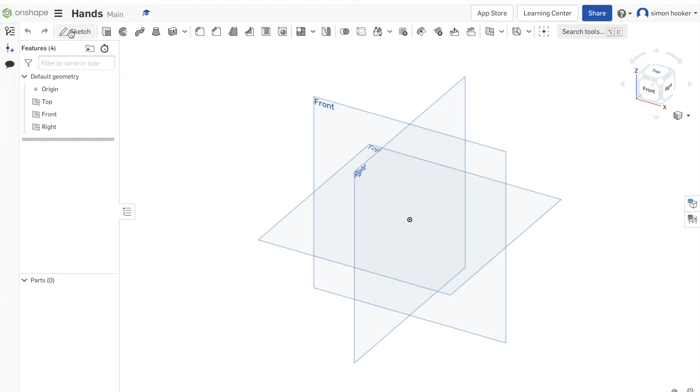I've just created a new document on Onshape and called it hands, because we're going to make the arms and hands for the robot. I'm going to click on sketch, and for the name I'm going to call this palm. I'll click on the pencil mark, type in palm, and for the sketch plane I'm going to select the front.

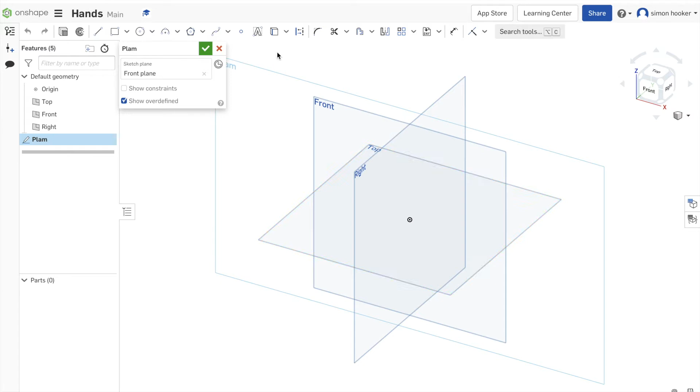Don't press the tick like I just did. If you do, just right click and go to edit and it will come back to you. Now I'll click on the front so it spins the object around in front of me. Click on the circle, click once to start drawing, click again to finish. We'll dimension this to 6mm and press enter. If I'm happy with that, I press the tick.

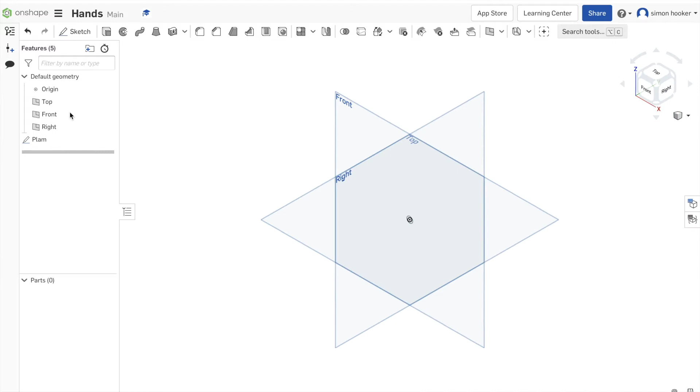I'm going to view it in isometric and click extrude. I'll select palm so it knows where it's going, choose symmetric, and change the setting to 3mm, the same as the holes we made in the body.

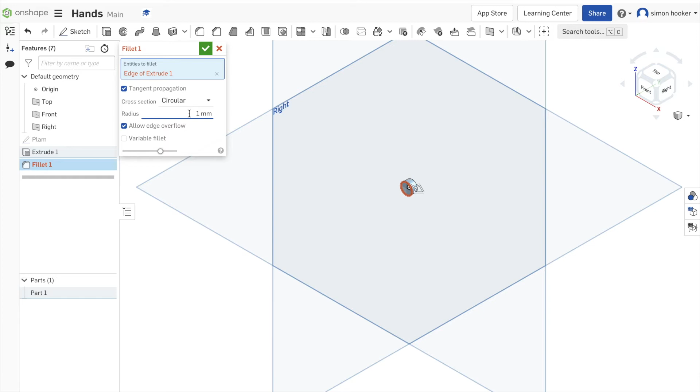Using the scroll wheel to zoom in, I'm now going to apply a fillet, 1mm to each side. So we've done one side, scroll in again, click on the other side, and we'll have a rounded edge on both sides.

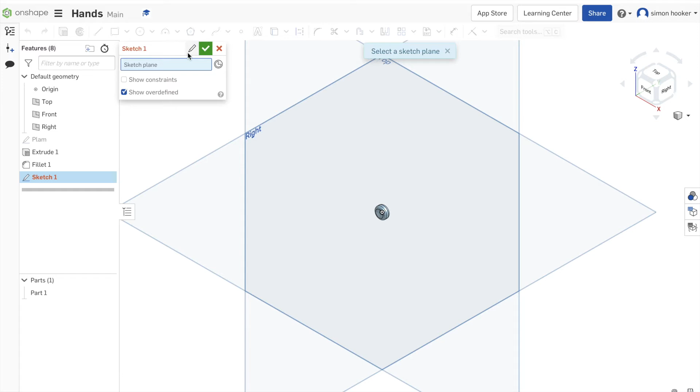The next part we're going to do is the arm. I'll press sketch, click on the right plane, and rename it to arm so we know what this is if we need to come back to it. Once I've clicked that right plane, I'll press the right face so I'm viewing it nicely.

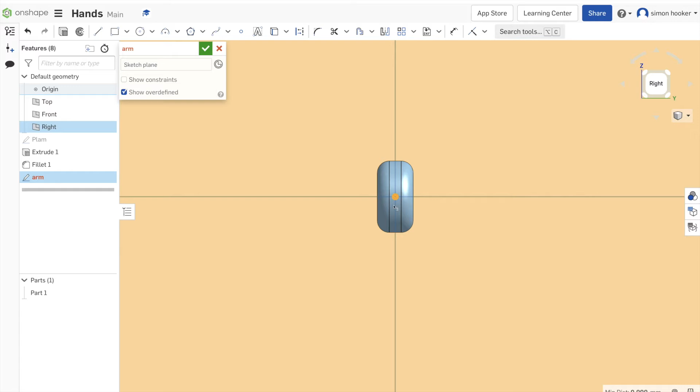We're going to draw a circle which will need to be resized to 3mm. Click once to start drawing - I just noticed I hadn't selected the sketch plane, that's why nothing was coming up. So if we click out, zoom out with the scroll wheel and re-click, the right plane now appears and we're good to draw this time. Apologies, still getting a bit used to this.

We click on that circle, click once to start drawing, and drag it out slightly bigger than the thing I'm trying to draw, then resize it down to 3. Double click to change the number, type in 3, and I'm happy with 3.

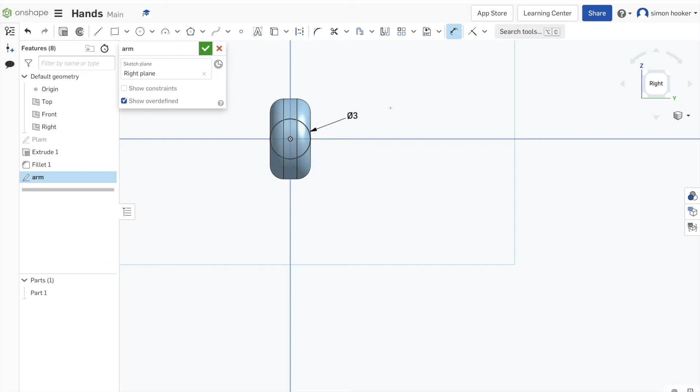We view it back in isometric by clicking that little button just below the square. Hopefully you're picking up these tips as you go on and getting a bit more used to using the software, with this being our third tutorial.

Extrude - I want to click on arm. It comes shooting forwards, so I'll flip it in the other direction and reduce the length down to 20mm, then press the tick.

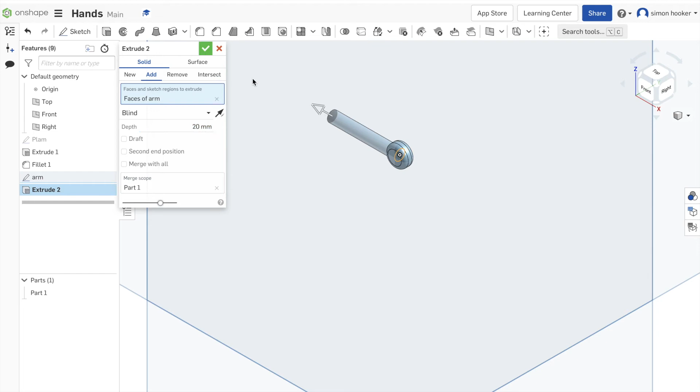So that's the arm, that's the palm made. Now we need to think about the fingers. Sketch again, we'll call it fingers, and the sketch plane is going to be top.

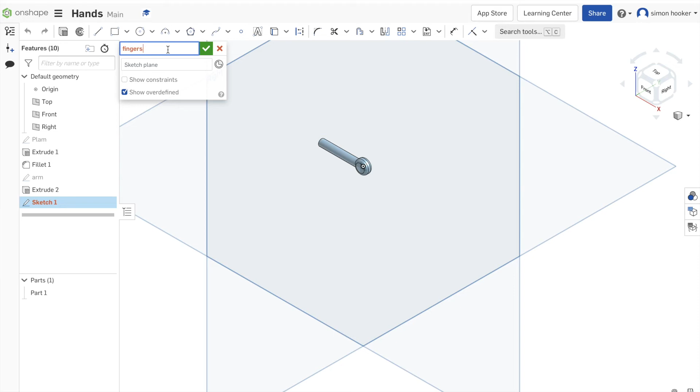This time, rather than doing a circle, I'm going to do an ellipse or oval shape, just to make it a bit more interesting and part of the design. So the sketch plane needs to be top, as we've just said. We'll click on the top plane first so it spins round, and use the scroll wheel to zoom in, making that area bigger.

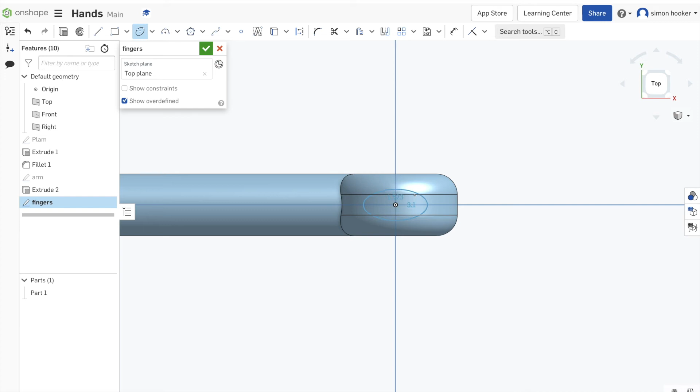Next to the circle there's a little arrow, and I'm going to click ellipse. Once we click once it will start drawing it - the first click does the width, the second click does the height, so you have to click it twice, and you can dimension it in both directions as well.

Depending where we move our mouse, we change that first one to 3mm. Then if I click the ellipse again and move it to the side, I can dimension the other piece, which we're going to change to 1.5mm. If we're happy with that, view it in isometric so you can see what's going on.

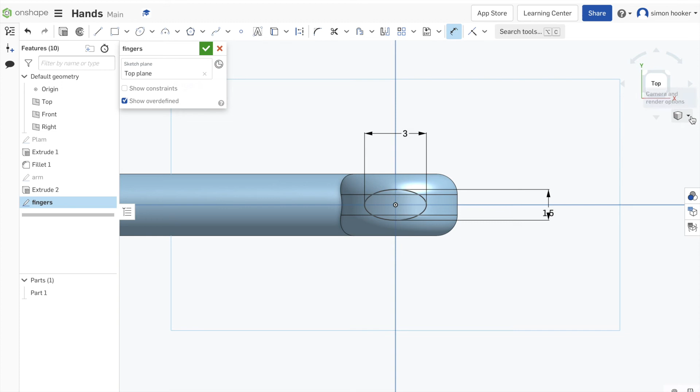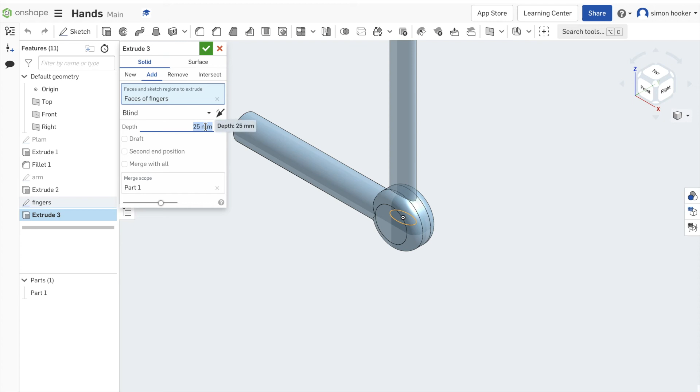So we're there in isometric, I'll use the scroll wheel to zoom in again. We'll press the tick to say we're happy, and go to extrude again. Fingers is selected so the extrude will pick up which one we're using. It's going to default at 25mm, so we'll change that down to 7, and press the tick to say we're happy.

Now, a clever feature in Onshape allows me to replicate or pattern that finger we've just drawn, so I don't have to draw it again. I'm going to click linear pattern and change it to circular, then change it from part pattern to feature pattern. I'll put in the axis - that's the part we're going to rotate around - feature extrude 3, and it will come up and put 4 fingers on there.

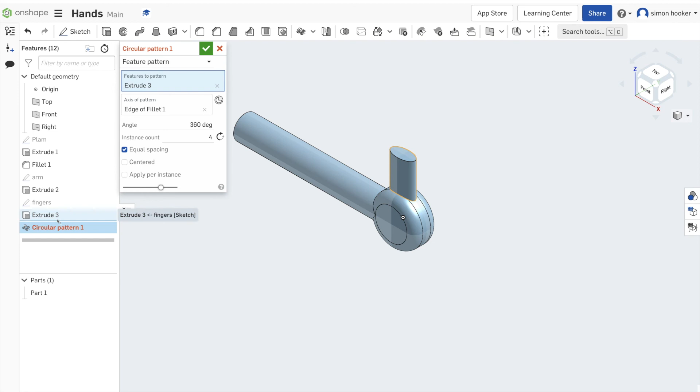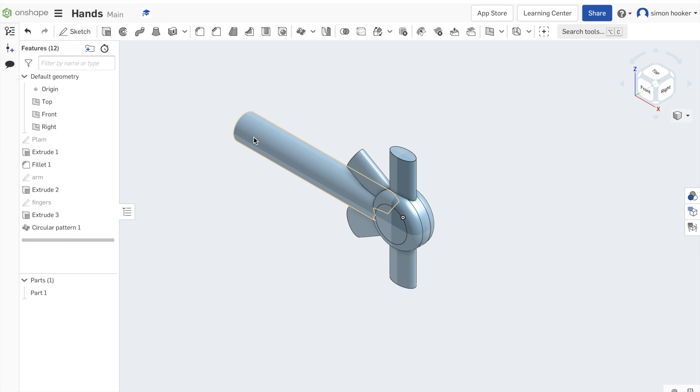I do want 4, but only through 180 degrees, so I don't want them going all the way round - I type in 180. We can then press the flip button so they're on the right side; I hadn't noticed I'd done that. Apply per instance, and I press the tick. Now, you'll notice I made a mistake there, but I can just go back, right click on edit, and change that little button next to the flip to turn it round the other way.

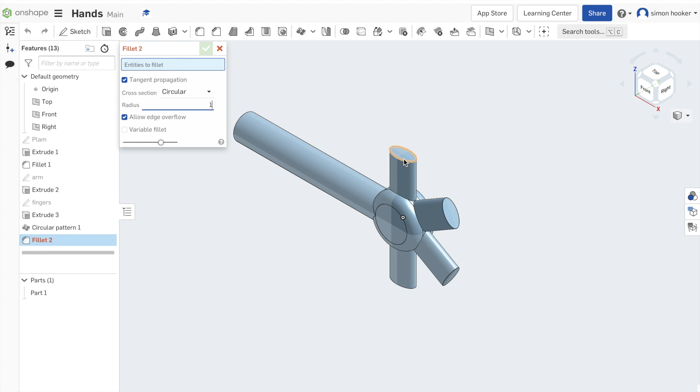And there we have our hand completed. I'm just going to put a fillet on the end of each finger - I tried 1, but I think it actually needs to be 0.5, since 1 is a bit too big. So we change it to 0.5, type that in, and then we're done.